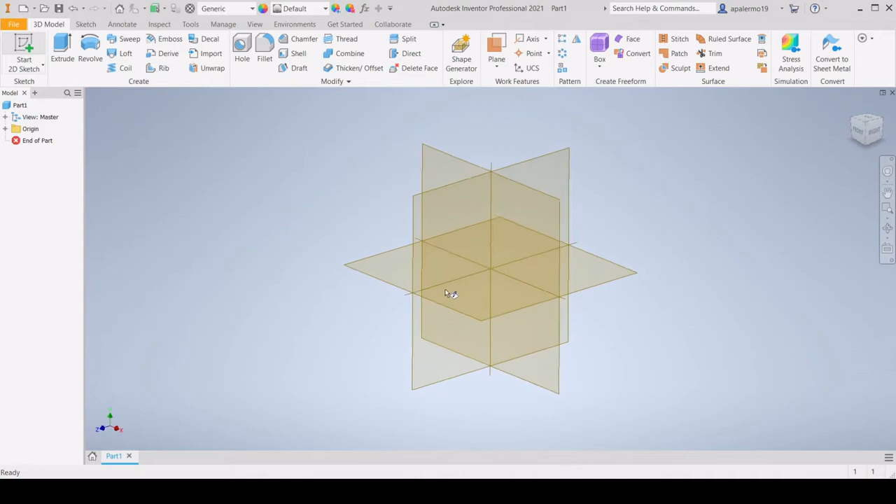Sometimes I notice that freehand CAD is actually kind of fun. Now, this is if you know exactly what you want to do and you can kind of formulate what you want to do beforehand, but here I think we're just going to sketch some sort of shape on the XY or ZX plane here, and then we're going to make a helical pattern upwards and see just how it looks.

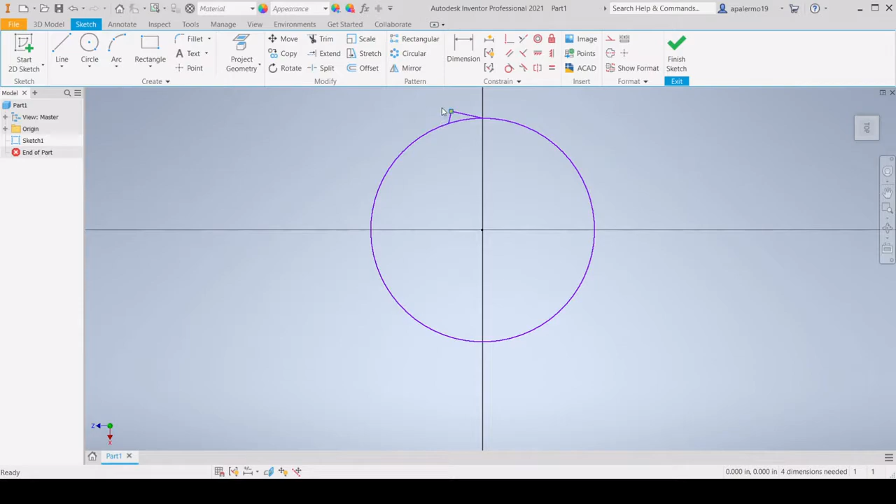So in the past I've done something like where I take my circle here and I did a line pattern where I had a line, not tangent, but at sort of an angle off of it, and then I went back. This was a 90-degree angle here, and it kind of looked pretty cool. Then I left a little circular cutout here so that when it was helixed up, it would have a groove running down the curve, so that I could run a piece of filament through there. That's been a pretty popular 3D print that people have been doing.

But for now, I want to see if maybe we could do just a simple hexagon. Maybe we could add more sides to it. So yeah, it's under the rectangle tool. Sometimes I still even have to play with it. So under polygon - here we got our hexagon.

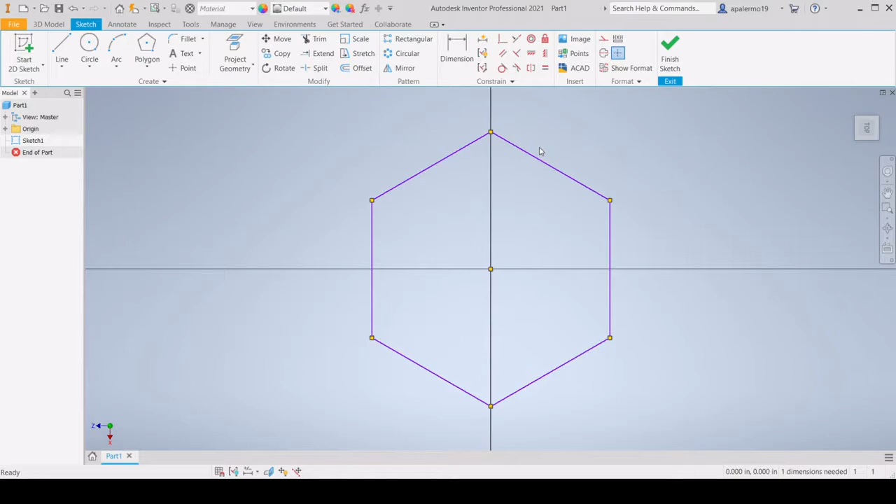Now for overall dimensioning, first of all we'll just make that line square. Sometimes I just play around with these two tools - these are constraints. Every once in a while you may even see me click a vertical constraint, and because of how your camera's rotated, it'll just go horizontal or totally the most incorrect way that you did not intend for it to go. Sometimes you just go Control Z and it'll take you back. But for now, we got that.

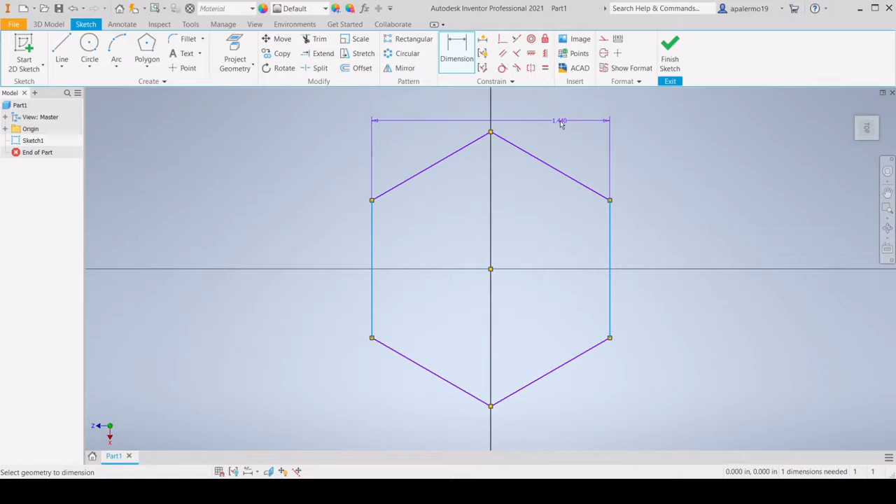So this dimension is probably the easiest to control, just so in real life I got my caliper here. I'm just kind of eyeballing it - how big do I see this being? Maybe we make a small one today. So I'll go 2 inches. It'll be kind of a testament to see how well my printer can print. So there's that - we got 2 inches there.

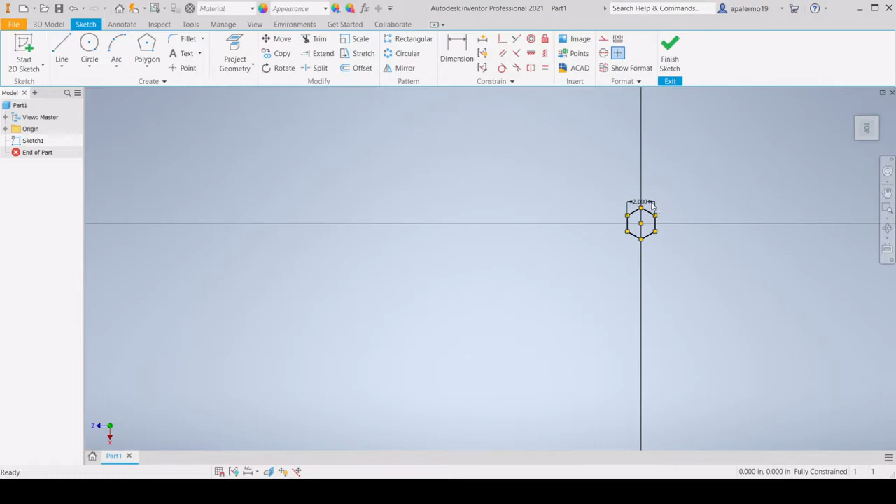This is different than SolidWorks. Typically you're able to drag it. Maybe if I press escape, and then I could drag it - there we go. So we have that, 2 inches, and it's going to be 2 on all the other sides. Got a polygon, so I'm going to click finish here.

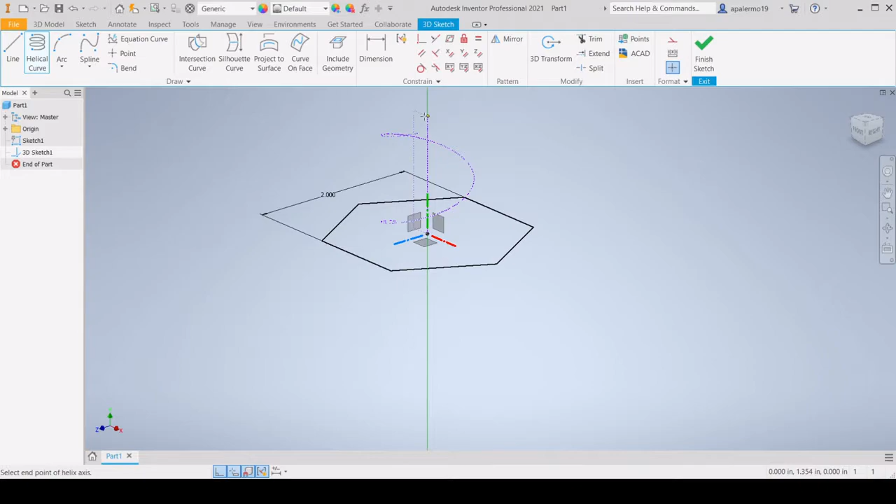And I believe we can go under 3D sketch and helical curve. Now here we could set where it's starting from, and then you see how I'm bringing it up like this. Now here we kind of can set the height, and then we also can set the pitch, which is going to be how tight each revolution is - you could think of it that way, how many revolutions per inch. So I'm just going to do a random number. How tall do we want the vase? That's really what this number is.

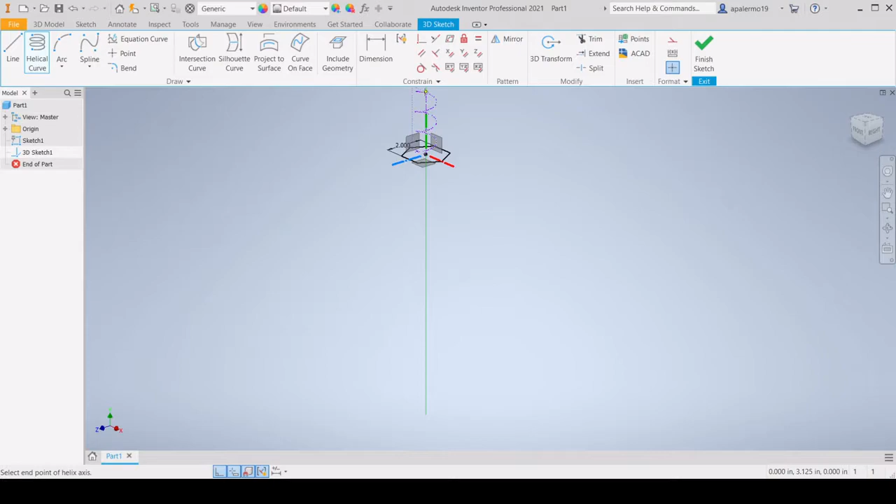So I'm going to go, again, with the caliper in real life, just opening it up. It looks like 4 inches might be nice. So it's a 2x4 - not really, but kind of. There's that. Diameter, I don't know if it matters too much. So the diameter of a helix - I'm going to go 2 just to keep it clean.

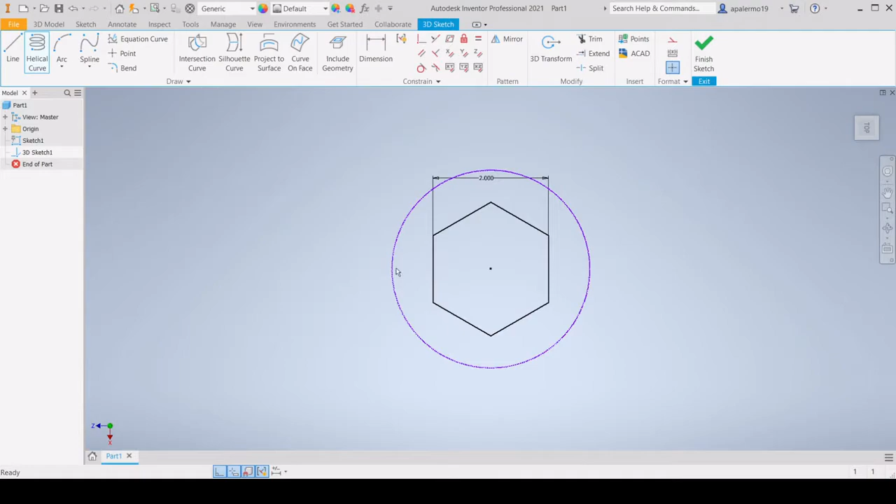And it's funny because that wasn't diameter, I believe it was radius. If we look on the top - I mean, yeah, that's probably an inch. That's probably an inch, no, I don't know what it is. That's kind of strange. Here it says 3.42 diameter. If we did 4... what is it picking off of first? Yeah, that's 4 inches. Interesting.

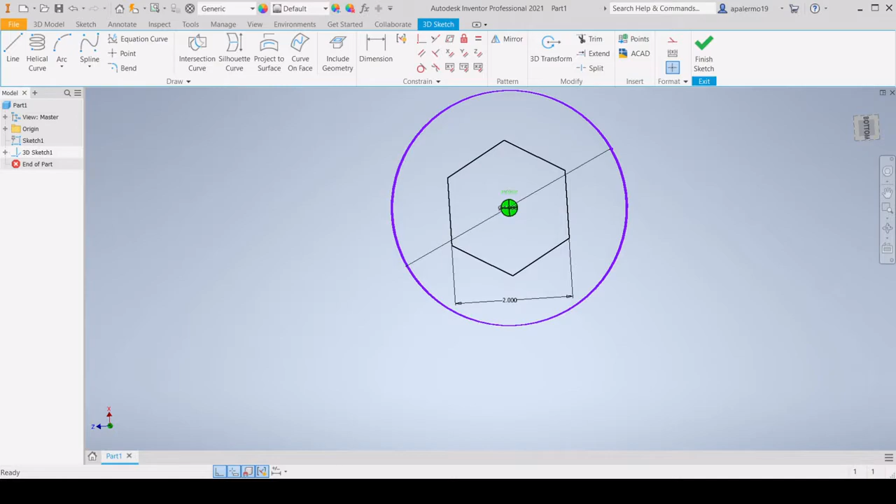So I don't think the diameter matters too much, because you could just select it as a shape to rotate this around, but I do want to open that up again. We could go under 3D Sketch, press the plus on the taskbar. That's what this entire feature is on the left side.

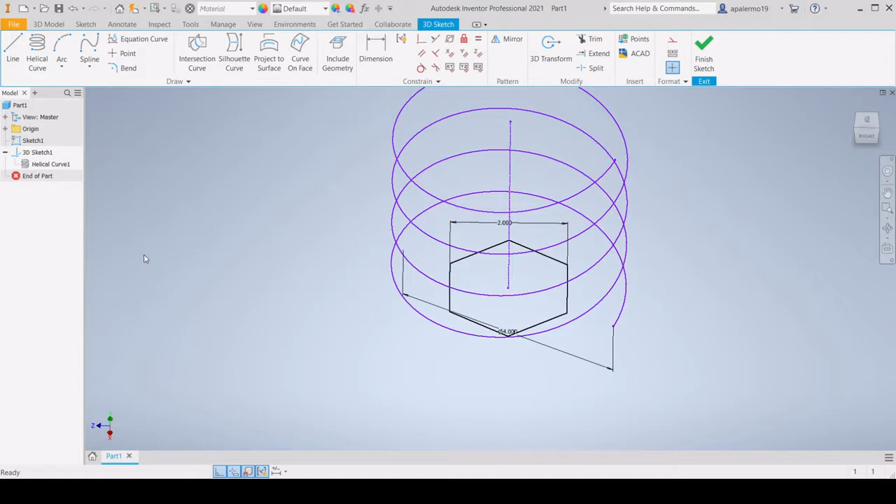Here's our helical curve. We could right click and click repeat helical curve if we wanted to do another one. Didn't mean to click that though. We want to click edit. So I'm going to make the pitch tighter, I'm going to go 2.

And so did that actually make it tighter? Let's see if we go 4. Did helical 4. Oh, for some reason the height of it just gets totally out of whack.

There's no dimension for the helical curve. So there are different types: pitch and revolution, or pitch and height. That's, I guess, what I'm more so looking for. So under this option here, I selected pitch and height, right here where my cursor is.

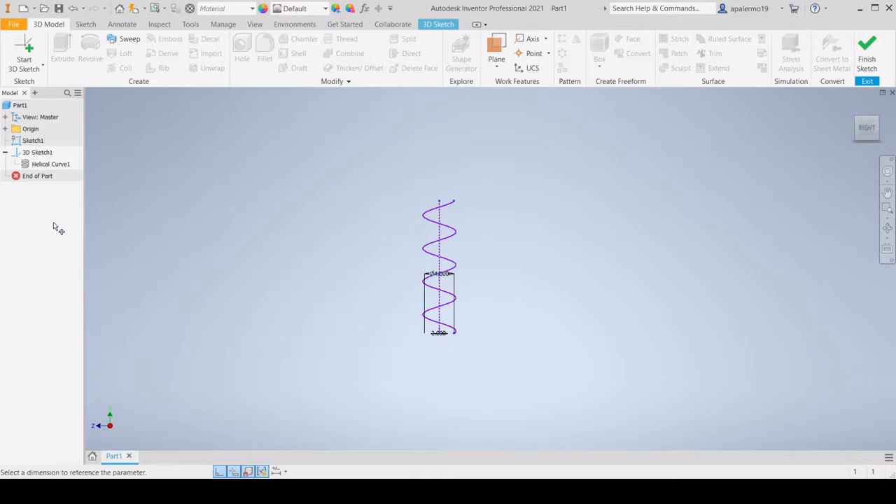Now I'm going to go a height of 4, so that's our 4 inches. And now our helical curve is looking kind of wimpy here. So I think a smaller pitch is going to give us more revolution. So there we go, that's going to be pretty crazy looking.

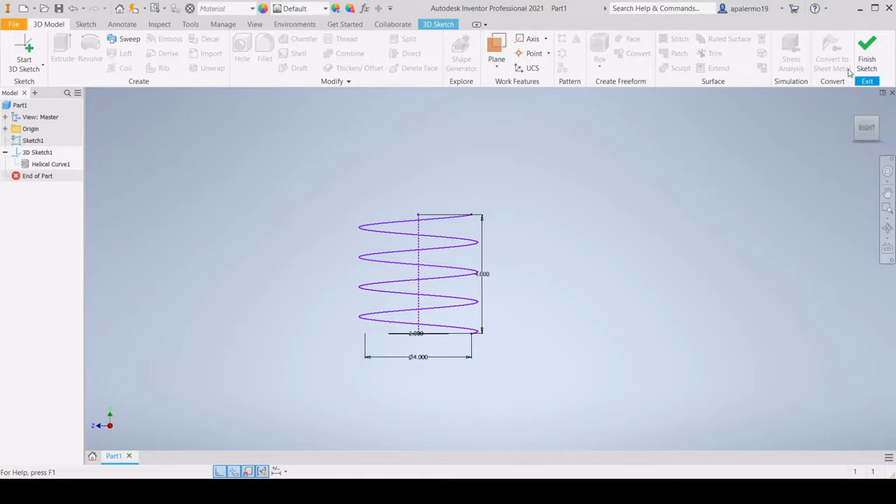But let's see, finish sketch. Here's that, so we have our 2 features. And then what we can do is something - I believe it's coil, if it's not coil, it's not revolve. It could be sweep, but I'm going to try coil first. So there's that.

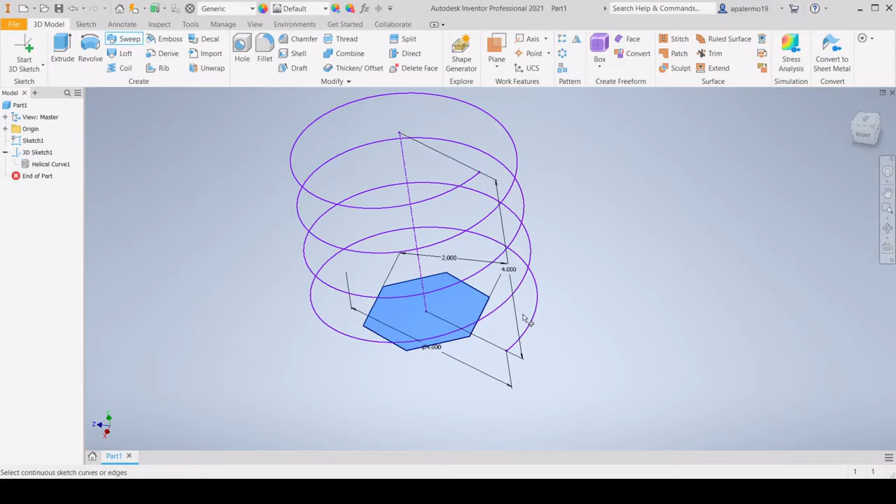Axis. No, this doesn't look right. So it's not coil, I believe it is sweep. Yeah, so here's our profile, it automatically selected it. We could select a curve, which I believe - yeah, I had to click here again. And we could just select that, and then it just kind of corkscrews up.

I'm going to click OK and just see how this looks. Wow, that almost looks like - that literally looks like a thread. So that's extremely tight.

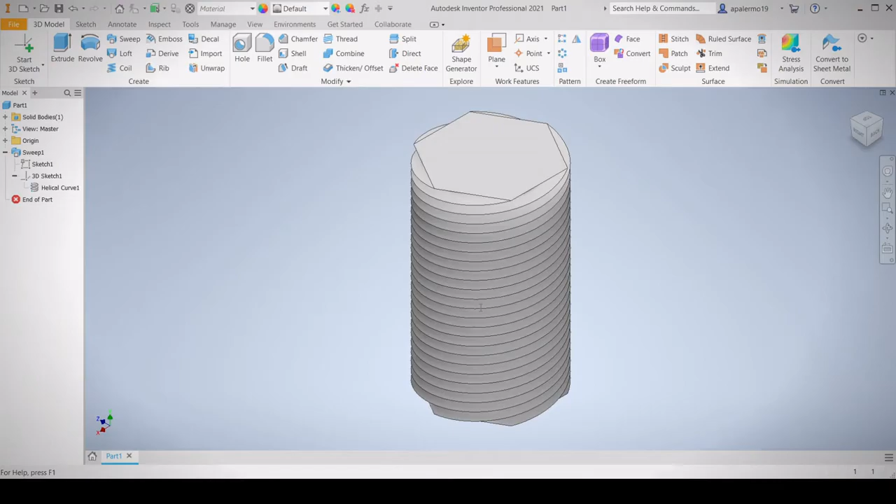So one of the nice things after you do this, and you might need a good computer, I'm going to be honest with you. Because what happens a lot of times is if you do this crazy feature, it might lag you out. And what will happen then is if you try to go into our 3D sketch again and edit that curve, you could totally bust your program. So I'm going to go ahead and save it right now.

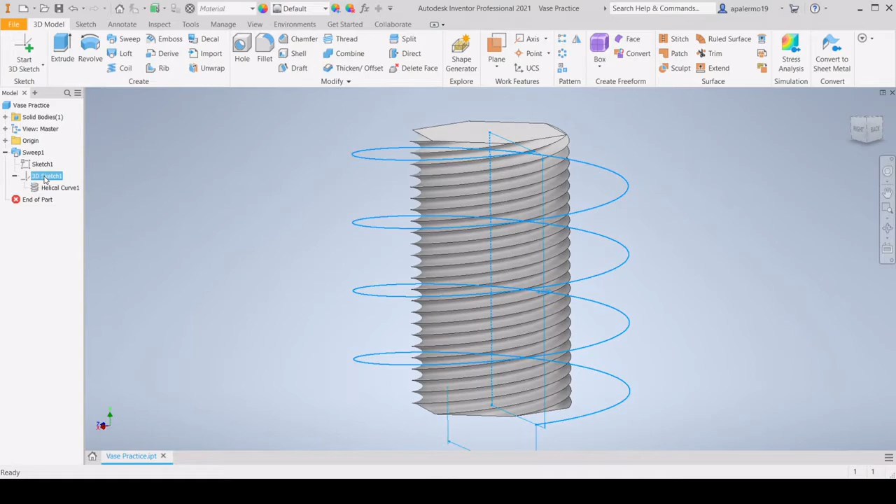That is pretty aggressive there in my opinion. So what I do want to do is edit that. Straight up here we can't do that, but we can - so it's interesting, you can't edit the helical curve right there. You got to go into the 3D sketch, then you got to edit the helical curve. So we're going to go half as aggressive, finish sketch, and then it should adjust just like that. So that looks pretty good in my opinion.

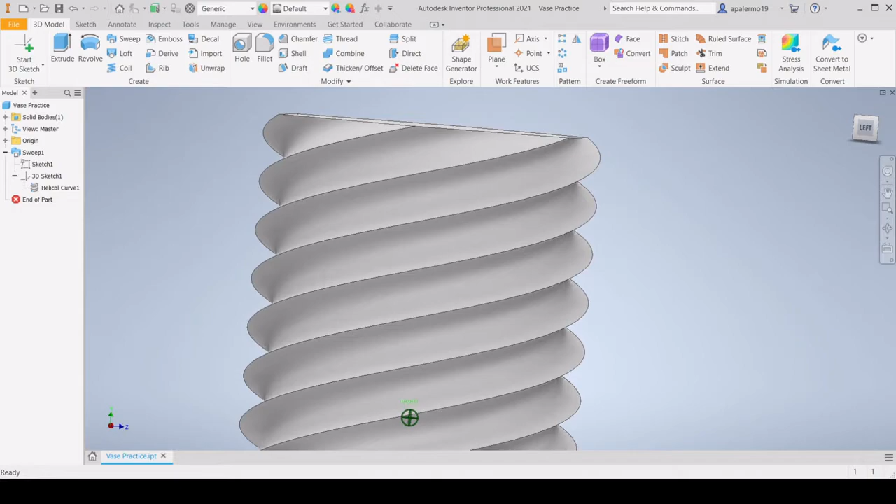Neat. So thinking about the application of this is probably more so modern art, if you could even call it that.

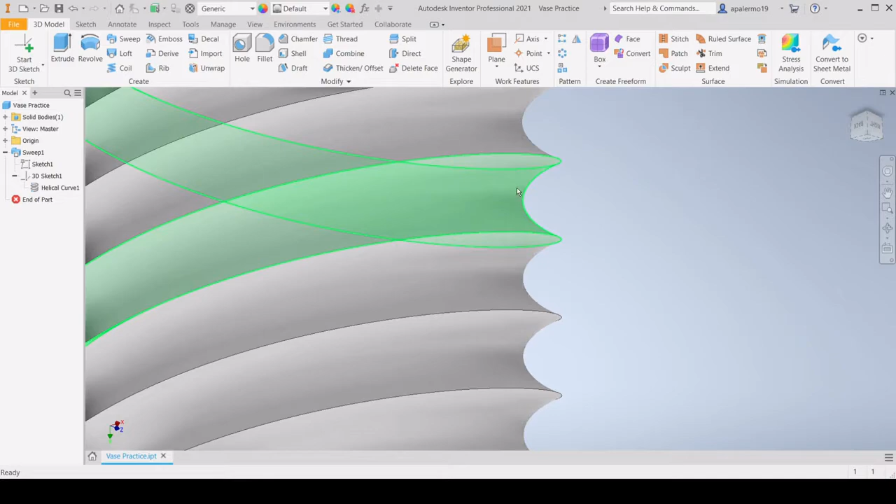So one thing I'm looking at is the side profile here. So how steep is that? Could that be printed without supports? Because technically you would need supports. So if I'm just going to go ahead and sketch in one of these, because it's overhanging, you would probably see some support material that would generate in that area.

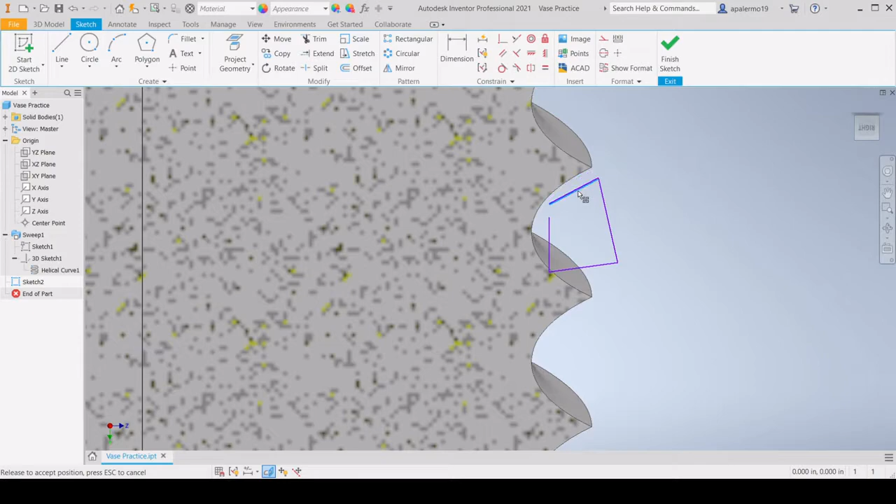I'm going to go ahead and click slice graphics. So this overhanging area would probably have some sort of support structure. That kind of looks like my terrible excuse for a sketch here, but something to bridge this gap so that this material up here has something to print on. And this would be of course removed after, but I believe that's not too aggressive.

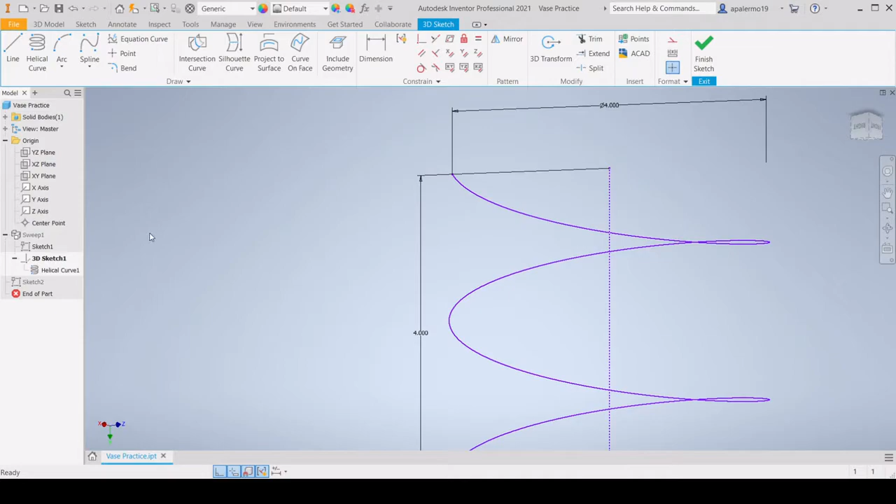So if we go back into our 3D sketch and then edit our curve again, we can choose the option again. I think, no, they don't have a helical angle, excuse me. Taper is another thing that you could play with, but maybe I'll go 1. So it's gonna have 4 revolutions. No, it looks tighter.

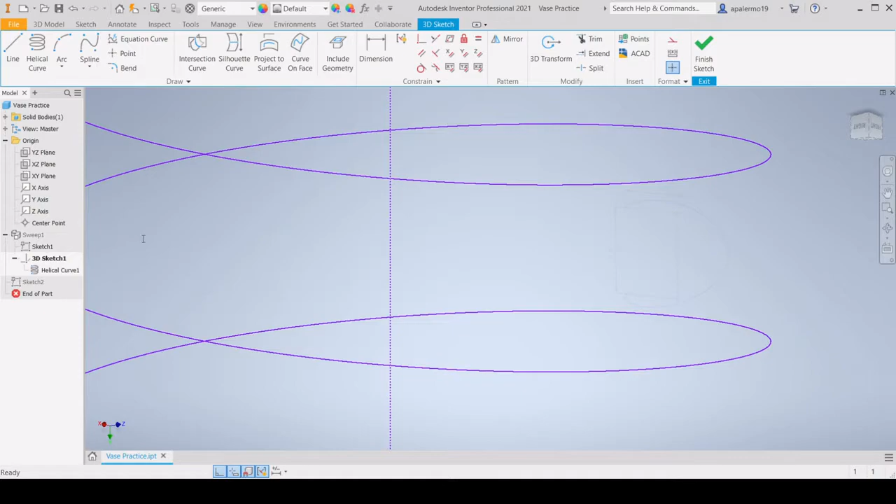So we'll go back, edit helical curve. Okay, let's see, 4 should do 1 revolution, 1 complete revolution. Yeah, there we go.

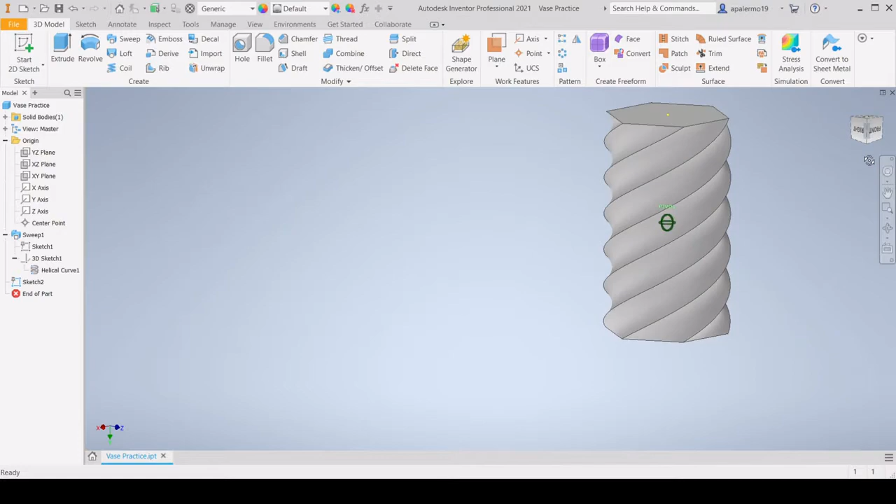If we edit our helical curve and we make the pitch larger, we're going to have less threads per inch, or rotations per inch. So here we are, that looks a little bit more doable on a printer. That looks a lot less aggressive, to be honest with you, than what we had before. So this would probably print without supports.

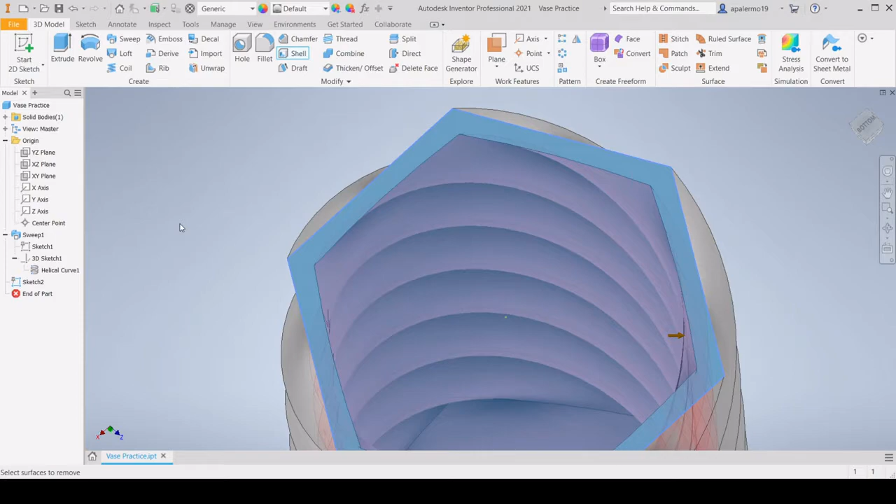Another thing that we can do, and this is a fun feature, so we could go ahead and up here on the top taskbar, under modify, we could shell this out.

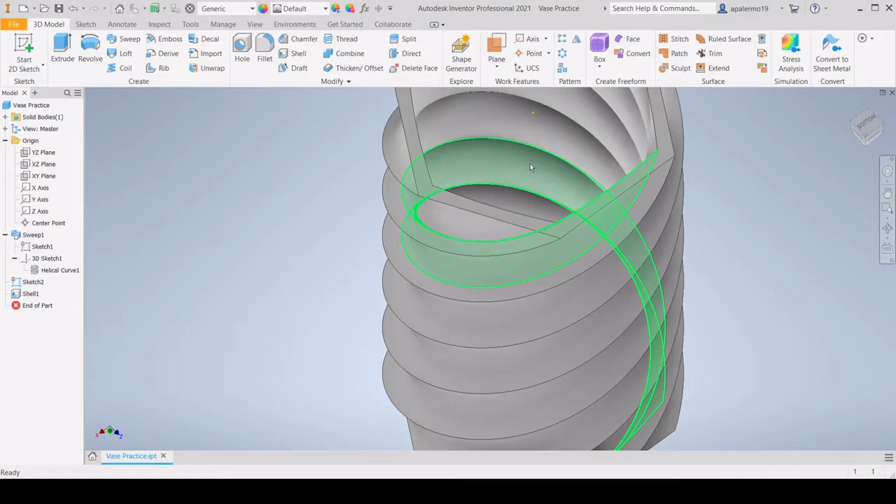Wow, so it actually has the internal geometry. It's doing a lot of math here. So I press OK. That looks kind of crazy, almost an optical illusion. Wow.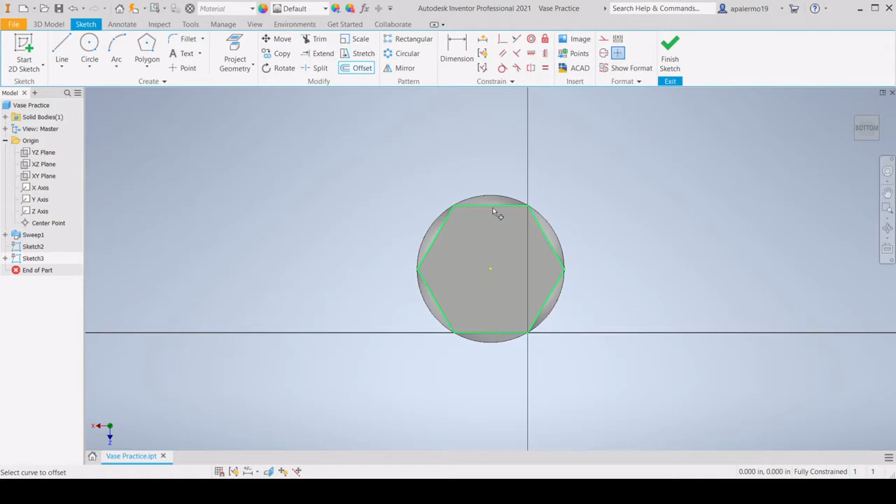That's pretty cool, but ergonomically you would not really want any ridges on the inside of your pencil holder. So to keep it simple, I'm going to go Control Z and get rid of that. I'm just going to do a sketch on the top, and then use one of the most overpowered things to ever exist in CAD, project geometry. I just tap that and it immediately sketches that surface at the sketch plane, which is amazing because it saves you all the time of fiddling around with this.

Once you have that, go back up here under the Modify tab and click Offset, and it selects it as one whole sketch. So now we could offset it. Generally I do like 100 thousandths, or 0.1 of an inch, so I'll do that here. That's going to give you a really nice border.

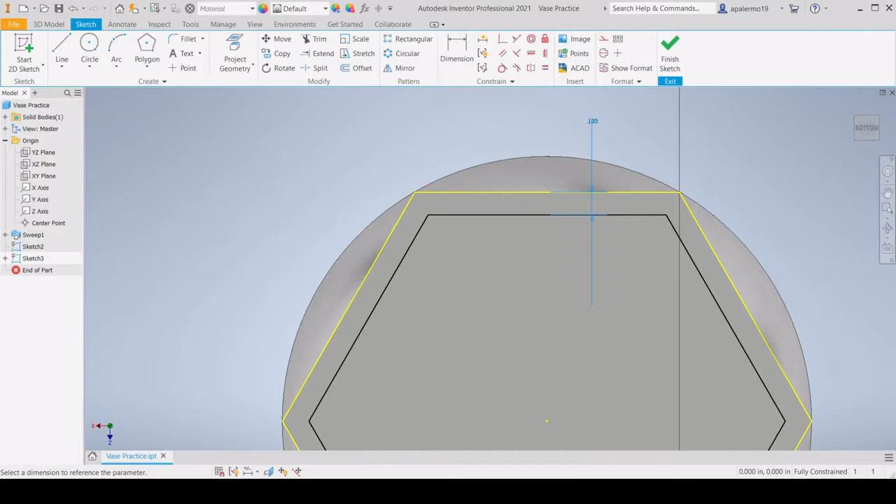In other cases you could do smaller, but thinking about how small this is going to be, it's not going to be under extreme stress, so you won't really need it to be resistant like a disposable water bottle, which is pretty flimsy. I'm talking about a reusable one, you can't really collapse those in. Maybe think about a medicine bottle, it's pretty strong. But I'm going to go 75 thou for now, plus we're going to have the strength from each of these.

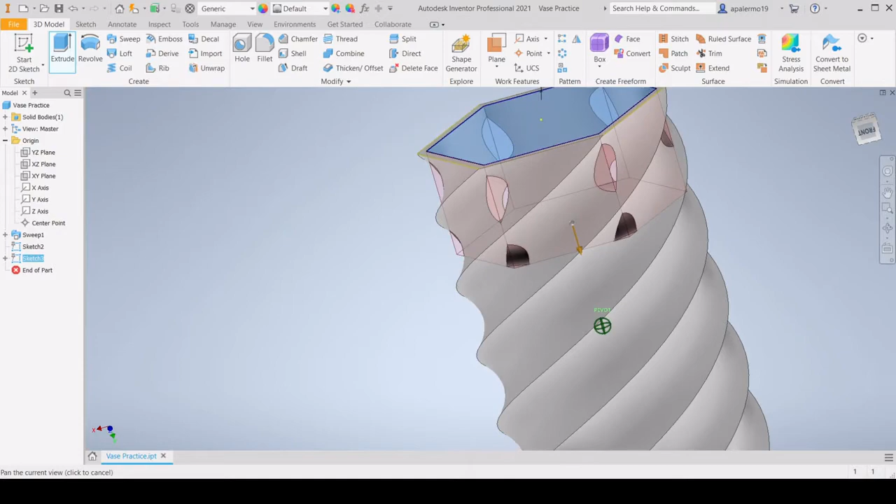One of my worries is that we're going to extrude into this side. You'll probably see what I'm talking about if it happens like that. Not rotate, here we go. And I'm going to go down. Wow, that's pretty interesting. So maybe we had a magic number at 100 thou, that's what I was worried about.

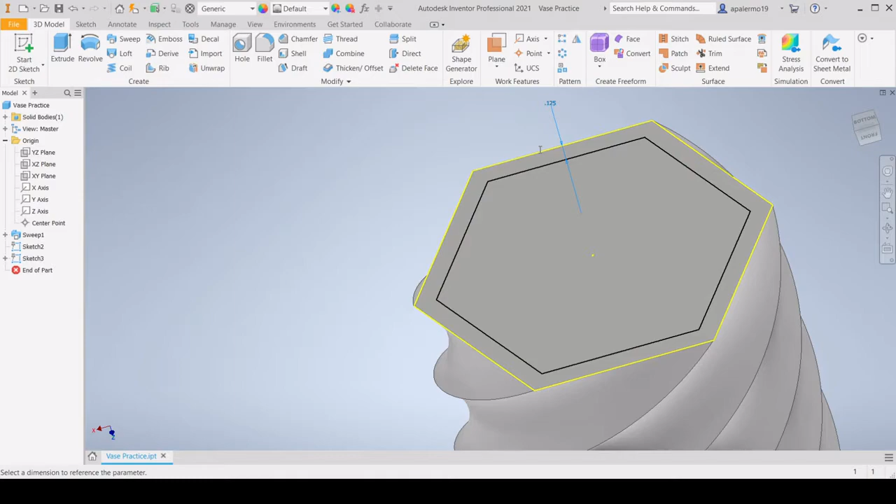So we could just go Control Z, and let's make it 0.15. Maybe we'll try 0.125, 125 thou. Then we can go to extrude, click that... still a little bit. Starting to feel like shelling it might not have been a bad idea in terms of ease of use, but 0.15 should be okay. I don't know though, so we'll see.

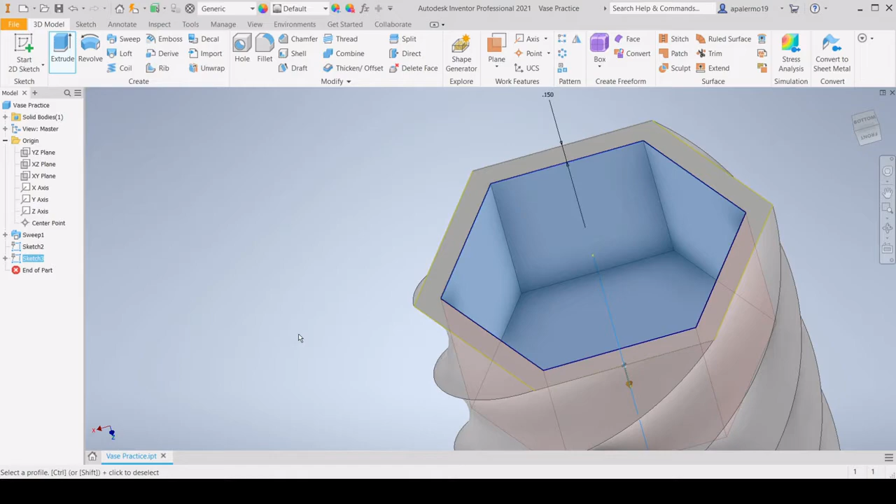Yeah, that's not bad. So we know it's 4 inches tall, so how thick do we want the very bottom to be? Do we want it a little bit thicker so it has some more weight down there? It's not like this is going to be toppling over, it's pretty short with a nice big base, but I don't know, what do we think? 3.75 would leave us with 4 minus 3.75, which is 1/4 of an inch at the bottom.

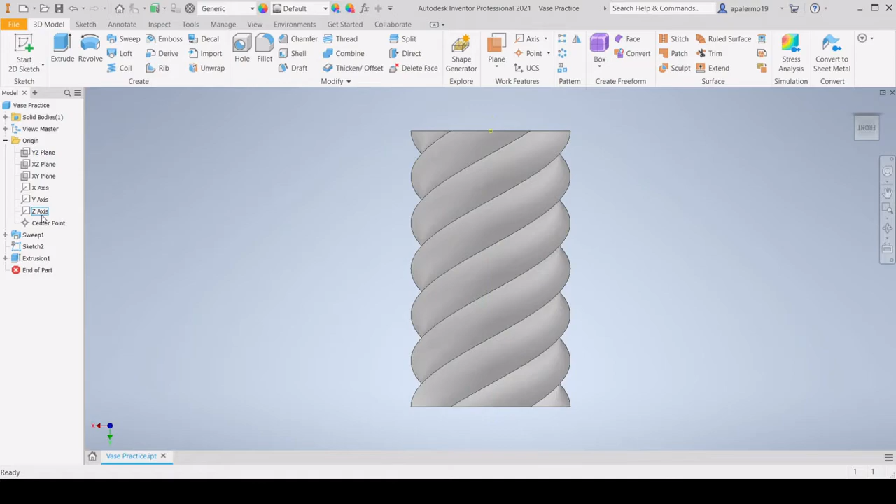That might be okay. So if we go to one of these planes, a couple quick CAD tips: taskbar, I call this the top taskbar. We have a bunch of different tabs: modify, create, explore, work features, patterns. I use patterns a lot. But on the taskbar on the left, if we click plus on this origin, it's going to give us the main planes, and these are very nice to pick off of.

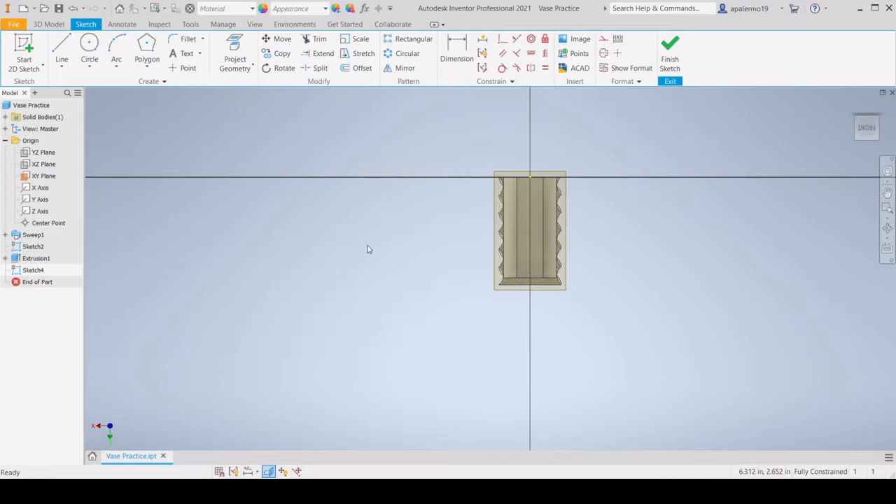So what I want to do right now is right click, I want to have you visible, and then I'm going to make a sketch on you. This is just very temporary. Then I'm going to go over the sketch feature here on the left, right click, and I did this before but for repetition, slice graphics. Boom, we sort of have a section view.

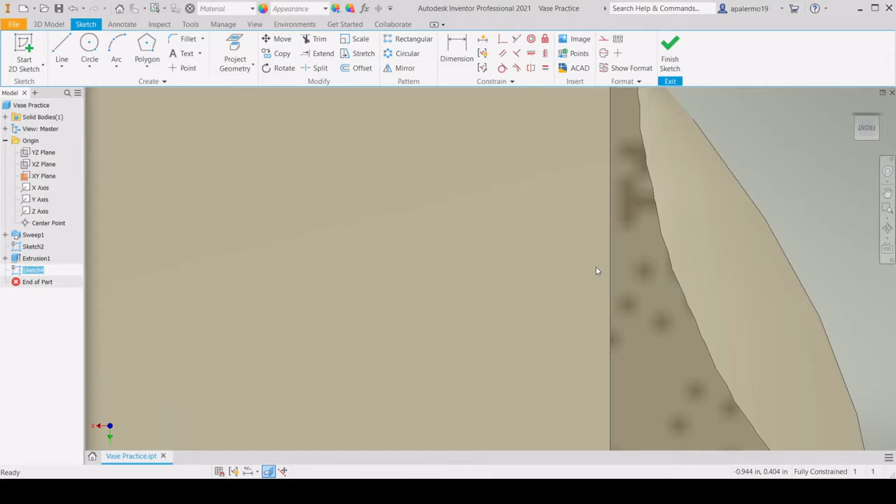Going through the middle of the part, because of how we initially designed it, we sketched the hex centered with this axis here, so we're exactly at half. I'm going to go back again, so let's see, there, slice graphics. So now we can kind of see we're getting pretty thin here.

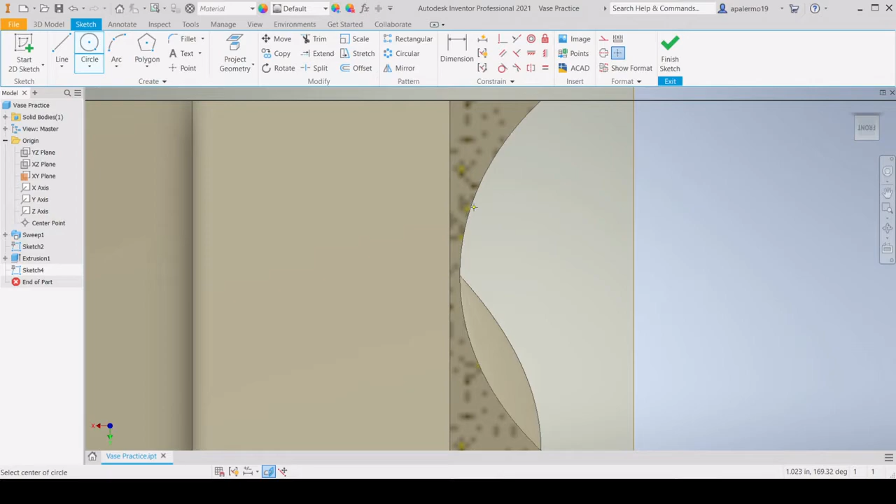And this is where it is as thin as possible. So what I want to do is make sure that this is actually able to be printed. So I could click... I don't know if I can. No, I can't, see, it'd be nice if project geometry could get this, but what we can do, I believe...

Now, I typically would not like this, but this line you could snap to, so that's there, that's said and done. But this one is pretty difficult to snap to because it doesn't have any snaps. So you could zoom in, and just for the hell of it, I will bring the point to the left of that line. Then I'm just going to do a dimension here and see where we're at. So clearly to the left, which would make that feature smaller. So if we're okay with it being smaller than the actual feature, it's probably going to print still well.

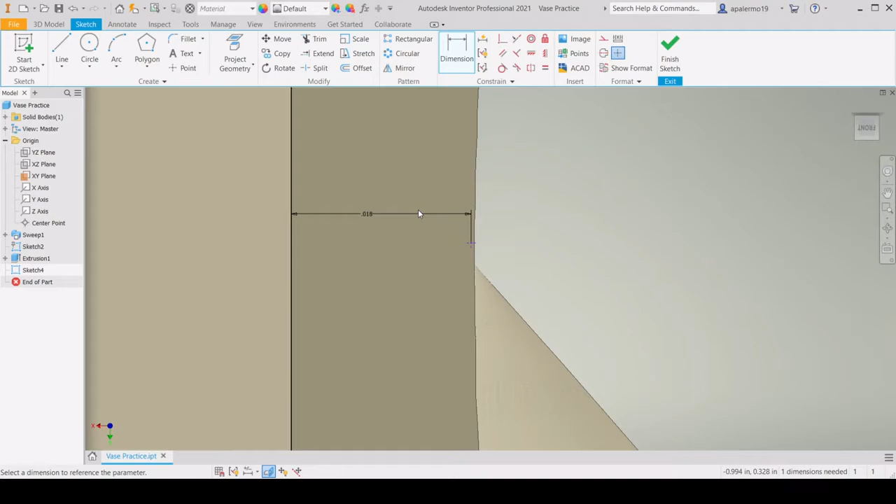For reference, 18 thou is very small. If we think of a piece of paper, it's 3/1000ths of an inch, 0.003, unbelievably small. And here we have 18, so that's 6 pieces of paper on top of each other. You can't even measure that thickness with this old physical caliper I have, which has almost the same precision as a ruler, so it's not very good. It's fine for estimating things, but in general, 18 thou is pretty small.

So in this case, I might offset it another 25 thousandths, and by 'it' I mean that extrusion into our little vase here.

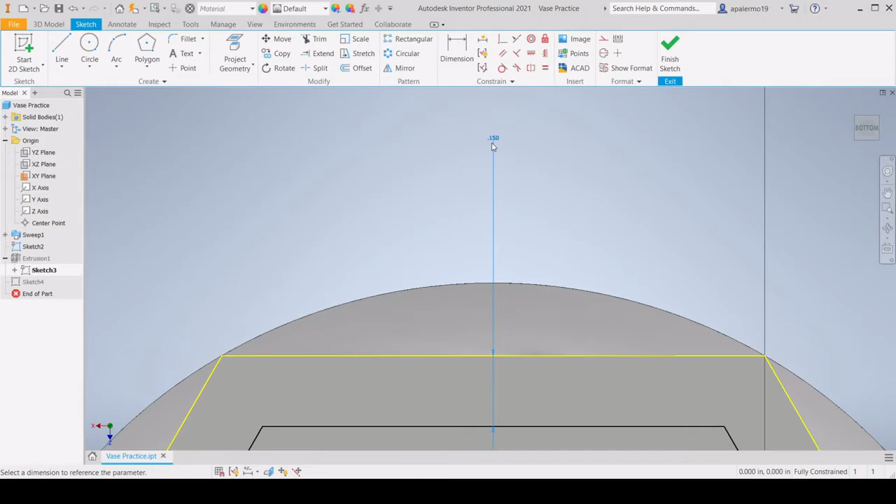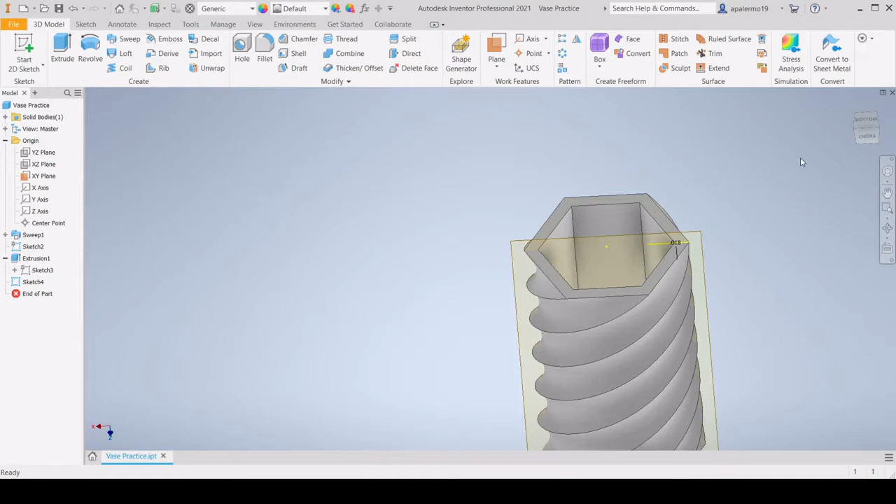So what I'm going to do is go back into our sketch that hollowed this out and edit it. Right now we're at 150. I know I said I wish I was at 0.075 before, but it looks like we're going to be at 0.175 now, giving us 25 thousandths more room to work with. This looks pretty bulky, but it should be okay. It's mainly an art piece so I'm not too worried, and plus this is all going to be hollowed out, so we could hollow it out further in our slicer.

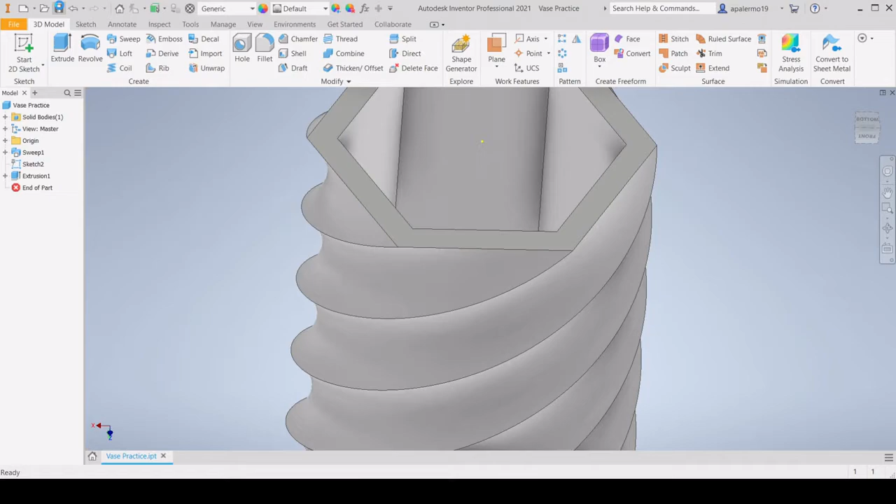It doesn't look too bad. Another thing, if your work planes and sketches get in the way, you could right-click and turn visibility off. A lot of times for useless sketches like this, just delete them, and then keep clicking these on the sides to keep it nice and organized.

That's usually how I leave the file, I'll save it and it looks nice. Other than that, another good practice to get into with CAD is to get the model into a nice isometric view. In this software, Inventor, if you use the view cube and click it, it'll move it into a nice area, kind of in the middle of your screen, out of the way. And then I would save it.

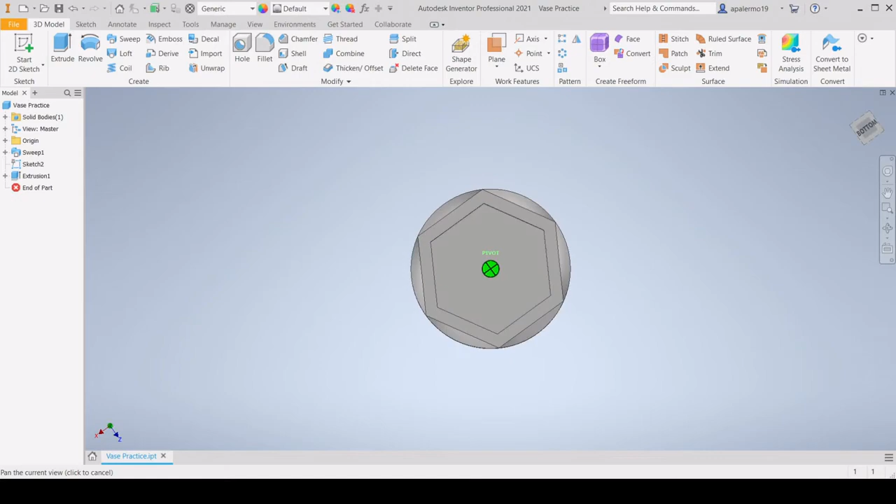And this is where I would close my file if I were done with it. The main benefit is when you open it up again, or if someone else opens it, it's going to be nice and clean, clearly in view, instead of having it messy. I mean, that's kind of a pain in the butt. Yeah, it's one click to get it back, but still, it's more presentable and more professional.

So this looks pretty good, I really like this. Now, kind of a side tangent here off of my entire video, which is already a side tangent on making vases.

In SolidWorks, there is a feature called configurations. With configurations, you could do a bunch of cool stuff. For example, this is my main part. I could create another configuration where, in the initial sketch or the helix, instead of 4 inches I make it 6 inches, and save that as a configuration, vase practice 6 inch. Then I can make an 8-inch derivative, a 10-inch derivative, and even a 4-inch base, 8-inch tall derivative of the original vase.

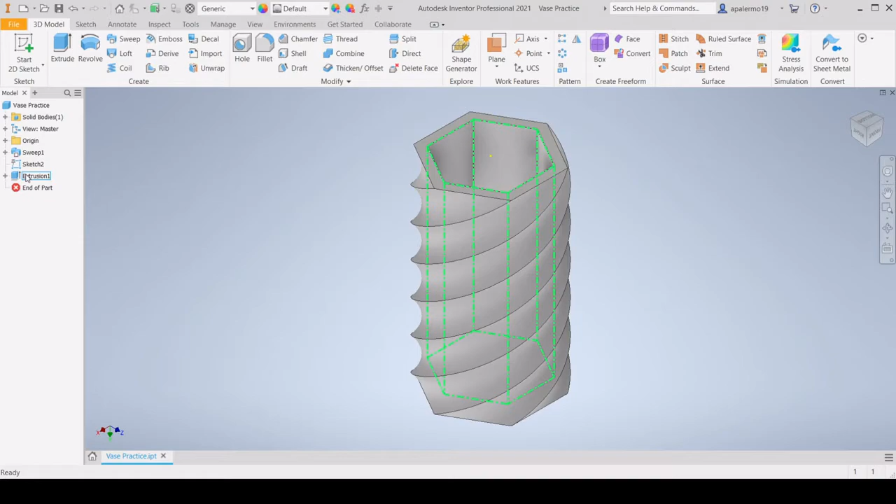I could make a different configuration with a different pitch of the helix. You could do a bunch of stuff, like make it not hollowed out, or completely suppress that extrusion feature in a configuration. Where that would be beneficial is you could make one type of vase with a nice style you like, and use different configurations to make different looking vases of the same type.

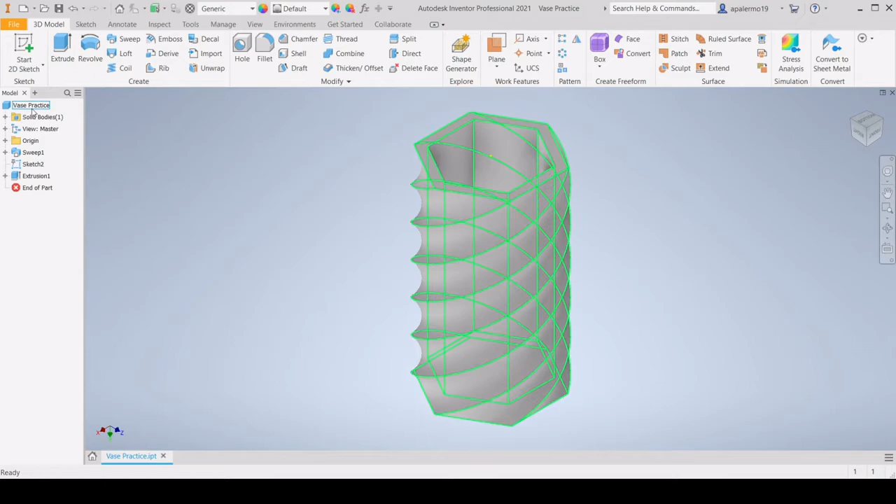That could possibly save a lot of CAD time instead of trying to make this all over again from the beginning, which, if you look at the video now, it's been around 20 minutes. That could save a lot of time. So these are all things I want to play around with to see if we could come up with strategies to automate making vases. Wow, so we're automating the CAD process and automating the production of them. Interesting.

Just looking at the show tabs, I'm only going to go on for another 5 minutes, I won't keep you long. iLogic... vase practice other... no way. Okay, so we have programming here. This is pretty interesting.

What am I doing? I don't know. This is a whole, oh my gosh, classes. Okay, this is out of my realm. I'm a mechanical engineer, I gotta be honest with you. But... what is this?

What? Okay, coding within Inventor. If anyone knows how to do this, please throw a video in the comments. I'll watch it and see if we could do some pretty fun things with it, because this is a whole other world of CAD.

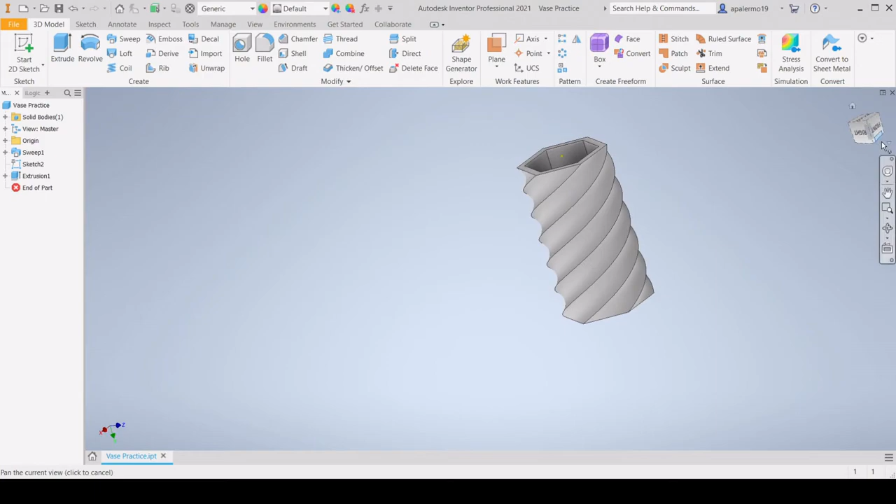I guess I can end this video off before 25 minutes with another life hack. So, other than leaving your part nice and professionally set up for the other person, which I'm gonna do now. That, save, that's looking good. I could close out of this.

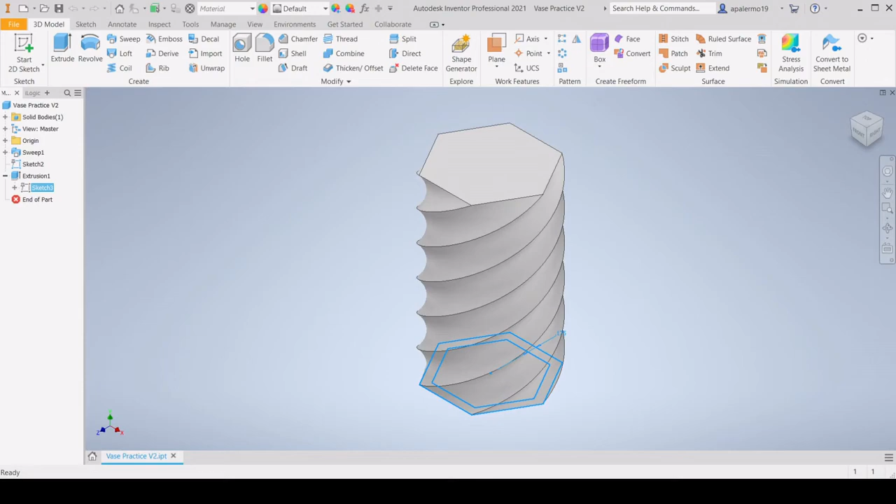Another life hack is that you can just, this is what I do for a lot of things, vase practice V2, save. Here's our new vase. Where'd our extrusion go? Oh, it's on the other side. Here, let's scooch you over here. Don't know why it's saved like that. Probably because that's how I had it before.

And now you could tweak dimensions. So, for example, quick example, we didn't want this down as far. We could do that, and now we have a different version of the vase. So, there's a lot of things you can do with CAD. Other than making vases, make literally anything you want. But just the overall ideas, I guess if you were to come away from this video with anything.